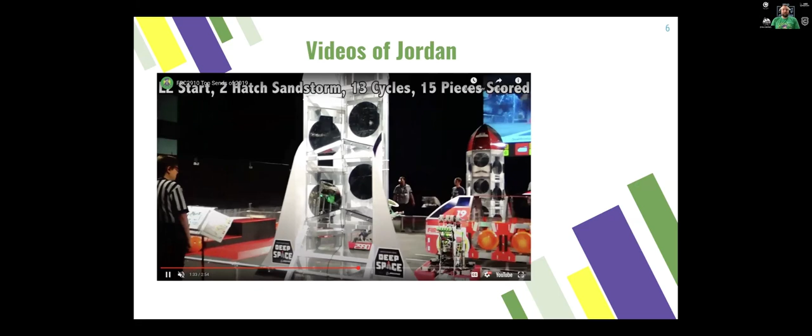This robot was the second year that 2910 was running Swerve, and the ability to speed around the field with a new - well, the second version of what would eventually become the Swerve Drive Specialties modules that Patrick designed. Sorry for the choppiness in the video.

This robot, Jordan, 2910 Jack in the Bot, was able to spend their match time on both sides of the cargo ship, just roaming around their half of the field, making them very difficult to defend because it was fast, it was agile, and it stayed on the ground. Nothing went up above the starting configuration, so all four wheels stayed on the ground, and it just zipped around.

Relative to other robots from this year, when they got to the higher levels of the rocket, many of them would have issues where they would have to drive slower so that they wouldn't tip over. So 2910 didn't have any speed restrictions on their driving, and they were able to navigate around the field very quickly.

We have another quick video. This is how the climb worked. So because you picked up game pieces from the floor, the cargo balls, and you had to deliver them slightly higher than on the floor, they had to be up a couple of feet. The whole cargo ball mechanism had to rotate, had to be able to do the wrist motion. And because it didn't need to be lightning fast, just the absolute fastest thing, it could be very torquey.

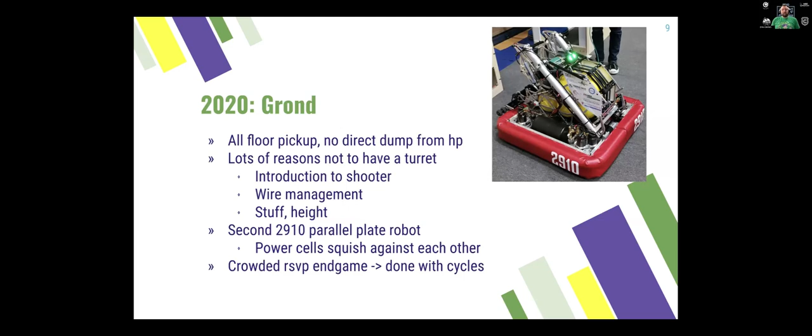And one of the things that Jack in the Bot noticed about this game was if you were doing the end game task, which was set up for about the last 30 seconds of the match, then the area in the center of the field was not somewhere you could drive through. You could not drive through there to continue to score the game pieces. So they needed to be able to drive under the scoring panel, this table that was in the trench run in the protected zone on the side of the field. And that meant that their robot had to be short.

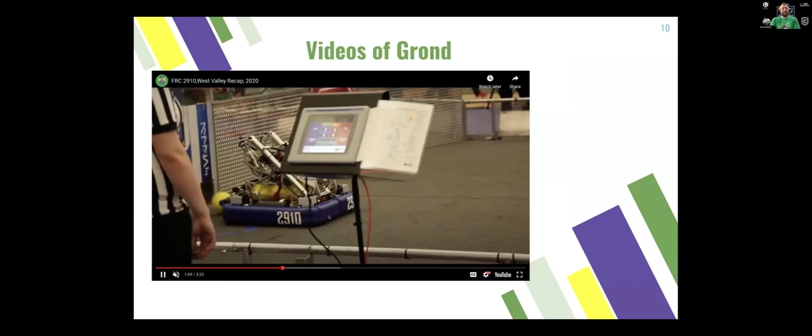So to get this to work, this is a video of it picking up game pieces off the ground. Again, it may be sort of buffering and slow, but the whole intake would funnel them just across the front of the bumpers and then directly into the ball management system, the S curve that formed the ball path. And it would do that before it got into the robot.

And they would just live in there and move bit by bit up into the shooter and be staged just serialized. So one after another in one straight line. This was very straightforward.

This meant that the entire design and path of the balls could be conceptualized all at once. We did not have to think about what is going to happen when it moves from this part of the robot to this part of the robot. We knew what would happen.

And this is from the release video showing how the lack of a turret was not a detriment, because the robot was able to move its base to target onto the vision target at the high goal.

So in a second year, there was a part of the robot that would slightly extend to climb at the end, but it was separated from everything else on the robot, and everything could just be short. Nothing had to pop up. Nothing for the power cell scoring had to move above the starting configuration. It was all very static - just a set of spinning wheels and a set of spinning belts to move the balls up into those fast spinning wheels.

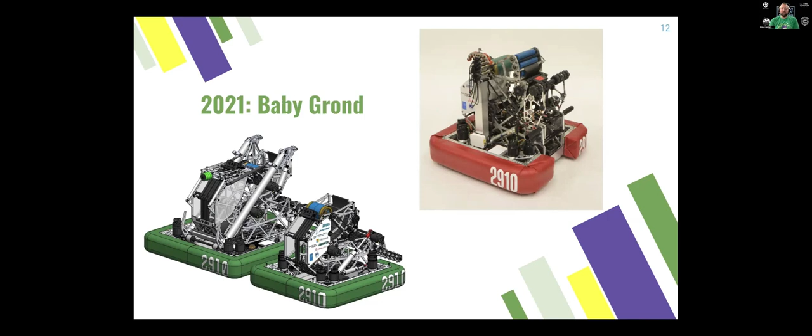So to shrink everything down and just make the robot smaller, to kind of prove out how small you can make a robot with the most recent version of the swerve modules, it was very similar to the robot from 2020, Grond. We called it Baby Grond because it was just mostly a scaled down version with a couple of lessons learned baked into it.

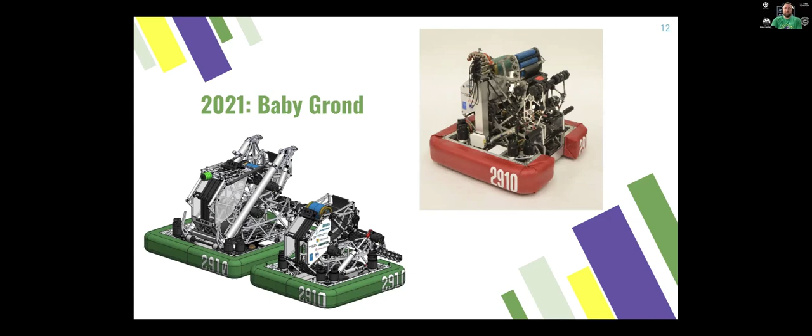One of the things we learned about making this is it's still a very short robot. It was shorter than the previous version, but it was also a robot with a shorter wheelbase and narrower wheel track, so the wheels were closer together relative to the previous version.

This is a video from Chezy Champs 2021 with the robot just stopping and falling over. Because while the center of gravity was pretty low on this robot, it was short, and because the wheels were close together, it did not have as much stability as you would want. There were ways to make it so the robot wouldn't fall over - it didn't fall over in most of its matches, but that requires not driving at full speed.

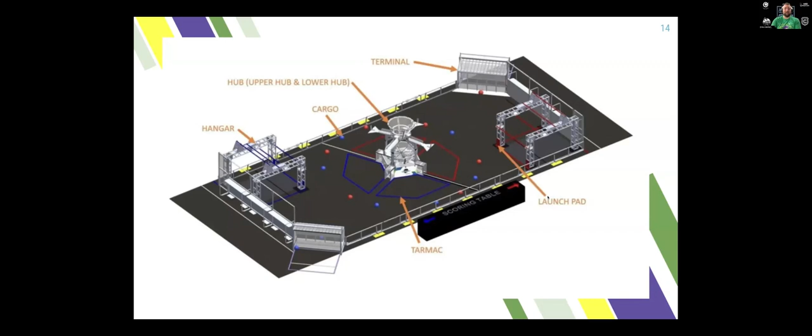So there is some trade-off if you have a smaller robot base, to allow for more space around your robot for your partners to play, or on a certain game element.

Moving on to 2022, Rapid React, the first game back after the lockdowns - the field was pretty open. There was a game piece scoring mechanism in the center of the hub, and you could hold two game pieces at a time, and you would just continuously launch, or you would try to make a cycle where you didn't go to a fixed location.

Because the cargo would recycle out of the hub in a somewhat random distribution, the robot had to be able to move around the field very quickly, then turn and very quickly lock onto the vision targets on the hub, and just do that over and over again very quickly. So maneuverability was again a very high priority.

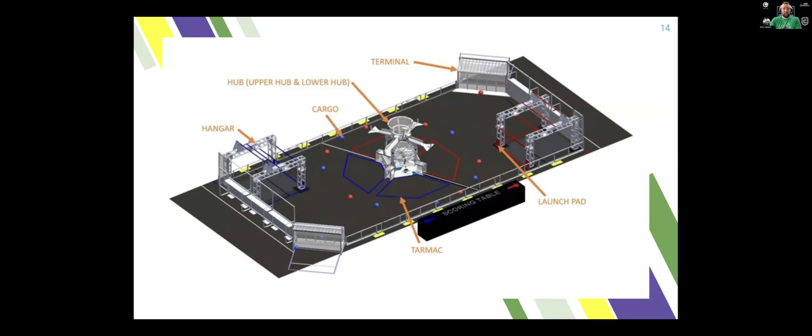And looking at the game, there was a high place to score, and you had to launch the balls. So it takes technically less energy to launch a ball if your shooter wheels are higher up on your robot. But you can just put a little bit more power into it and have them lower, have your center of gravity lower.

We weren't worried about the cargo being blocked by a tall defender with a blocker shield, because we were launching at such a high angle that it was never blocked. The balls come out high enough, because you wanted a high arc to score into the funnel at the top, that there was no actual shooting penalty for having your launching mechanism lower - because there were only two cargo that could be in your robot, except momentarily. There did not need to be a very long ball path, so there didn't need to be structure below or in front of the shooter that year.

Very similar intake as previous years, and the structure was the same, parallel plates, so a 2D thing mirrored. The shooter hood, since it had to adjust the angle that the cargo would come out at to shoot from different ranges on the field, already had to move angle. So just making that very powerful and torquey allowed us to use it to rotate the robot as it was going through the end game, moving through the bars. So one system being able to do two tasks means you don't have to fit another system next to it.

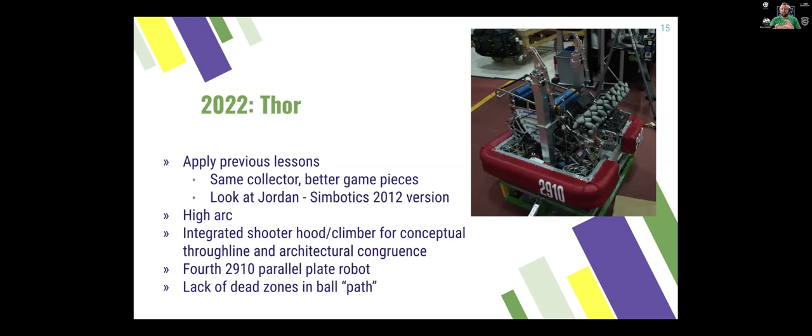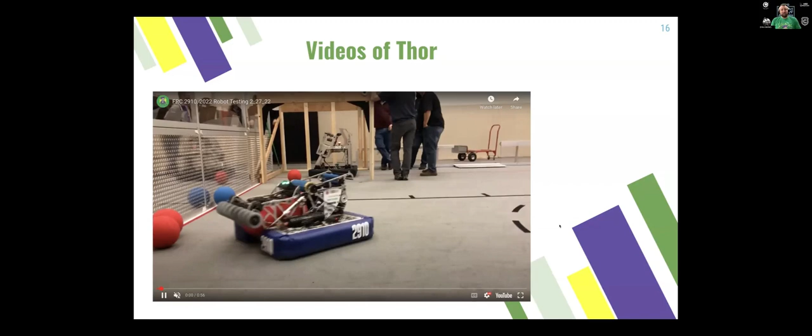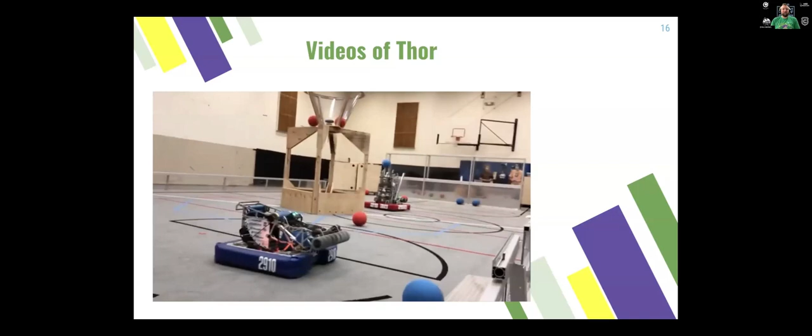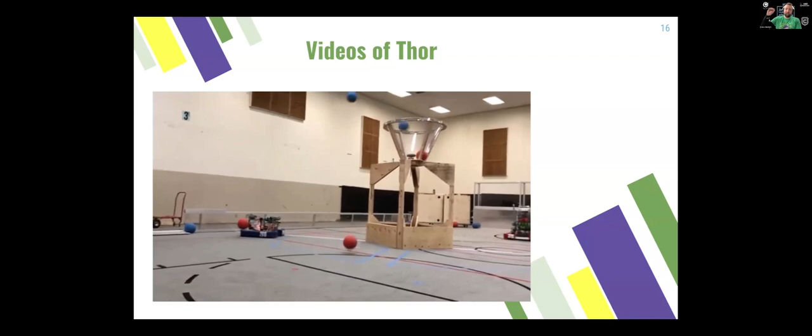And these are some videos of the robot moving around quickly — well, not quickly in the loading of the video — going from different locations around the field to pick up the game pieces, then just rotating to get to the scoring position. So it didn't need a turret for this. The swerve drive would be able to rotate the robot base, and the angled shooter hood would deal with the range that needed to change based on where we were shooting.

And this was one of the most successful autonomous modes from that year, very consistent. The robot was relatively straightforward to put together.

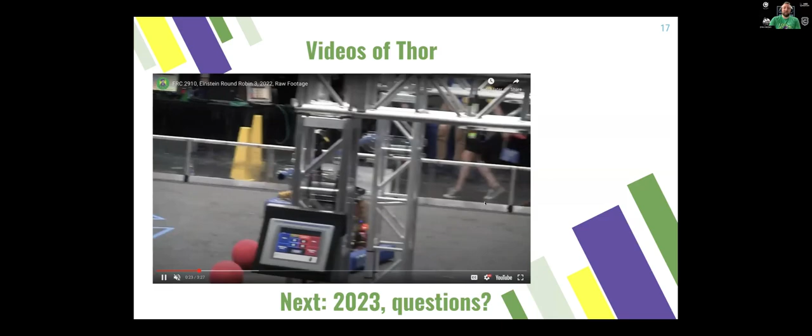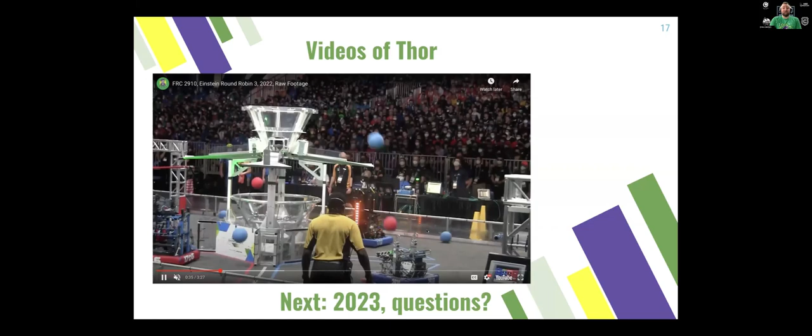Before it competed, even the first week that it competed, it was already doing the 5 cargo autonomous — the most points that any one robot, for the most part, scored from that year. So just having the robot together for a lot of time meant it was fairly well practiced, but also very stable, with a large robot base and everything low to the ground. It moved very well, it was very repeatable, and it was able to do autonomous mode the same way over and over.

So Charged Up came, it was the next game. 2023 started, and your robot had to reach out very far to score on the high nodes from that year.

Cubes and cones from that year, two different game pieces, very different from each other. One was rubber and would squish, and it was an odd shape relative to other things. The cube was just a ball — a ball with corners — but it was inflatable, so you had to protect it.

But the end game task from this year was to drive on top of a balancing structure. So you didn't need more than one mechanism to achieve anything in this game. You needed to be able to drive, and you needed to be able to move game pieces from where you pick them up in your loading zone and deliver them in your community nodes.

Very straightforward game. So when we looked at this, one of the ways to get a game piece far from your robot horizontally is to start moving it vertically, then move it out. An elevator and an extender is a very successful way that a lot of teams did it, but we saw that you did not need to go up very much — it was mostly an extension.

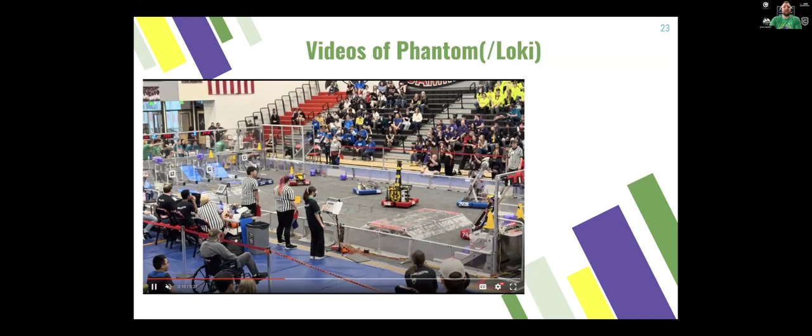So we were able to get 3 of the game pieces in autonomous that year. In terms of just driving, here's a video of our robot and our practice robot at an off-season event, cycling over the charge stations, going to the loading zones and the communities, and bouncing over the bump that was on one side of the charge station. These are all obstacles that could be daunting for some robots, but we just moved across them very quickly.

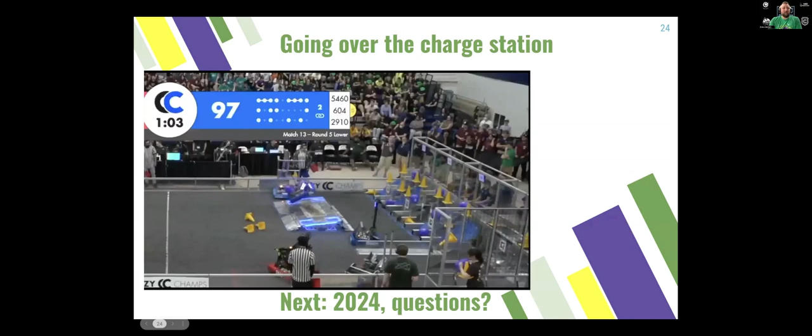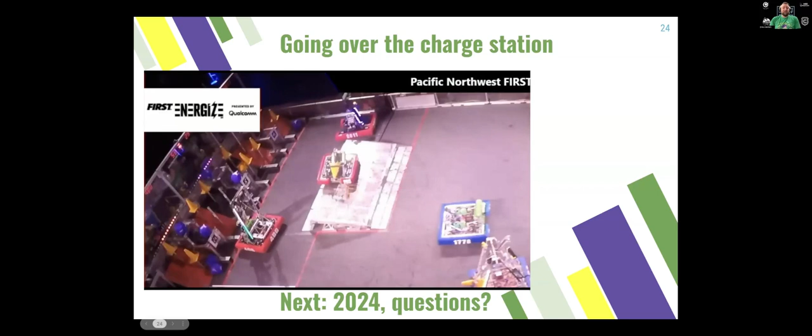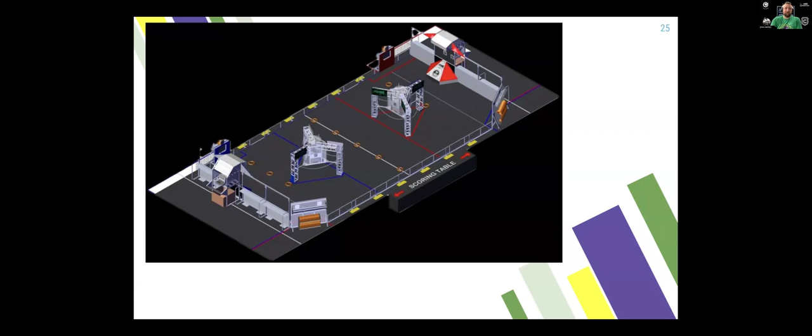And in Crescendo, this year's game in 2024, Jack in the Bot looked at the game and said, well, you can't be above a certain height except for climbing. And even climbing, you just need to move your climbing mechanism a little bit up to get onto that chain. Scoring from different locations around, shooting the notes—none of this really necessitated a taller robot. But we also wanted to be able to play defense and have all the capabilities of a very high-scoring note robot, so we wanted to somehow fit a turret into it.

With no other mechanisms on the robot, just a climber that fit on the perimeter and a note, that left us a lot of room to put a whole bunch of note-dealing stuff. So the whole shooter mechanism we put on top of a turret that sat very, very low in the robot, just above the tubes that make up the drive base.

We also didn't want other things to be able to go up very high. Our amp mechanism eventually ended up being a bar that rotated out, so that was able to get up to the height of the bottom of the stage or the chains, and the climber hooks could go above that. But other than that, a robot could be in its tallest shooting position and drive under the stage, and we wouldn't touch anything. So that was important.

We still wanted to have all of our weight very low, and early in the season we decided not to do any development to score in the trap, one of the main parts of the game that year, because it did not have an outsized influence in match scoring for playoffs. In playoffs, you could get 5 points for a note by scoring in the trap, or you could get 5 points for a note by scoring it in the place where you scored the notes all the time anyway.

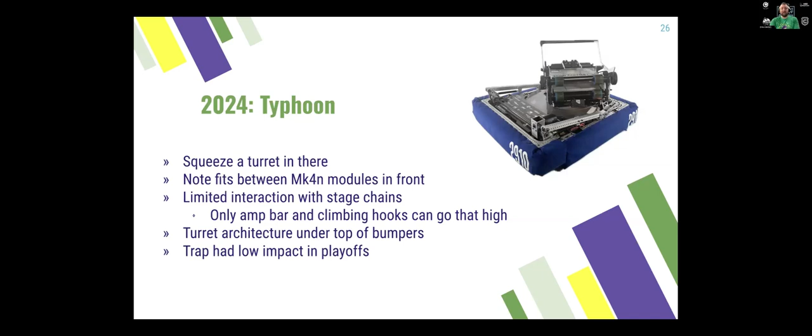It is now our goal when we design robots to keep the center of gravity below the top of the bumpers. The test you can do is put it on its side and see if it falls back onto its wheels. This sometimes comes up in matches. We had one instance in 2023 Charged Up where the robot went all the way over on its side trying to go up the charge station, but it did make it back onto its wheels.